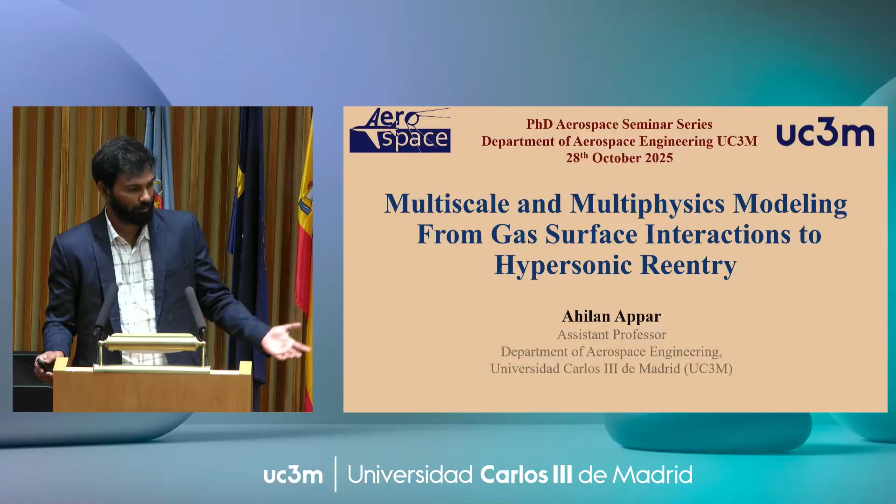My academic story: I was born and brought up in southern India, Tamil Nadu, and I did my bachelor's from Madras Institute of Technology, where I started learning aerospace, and I thought I knew everything. But when I went on to do master's and PhD at IIT Kanpur, the more and more you go into a research problem, you realize that you don't know a lot of things.

And then I did my postdoc at University of Kentucky, where I looked at gas surface interaction at very low Earth orbits. So there I made peace with the fact that academia is like a never-ending learning process. And with that wisdom, I joined UC3M, right now in front of you.

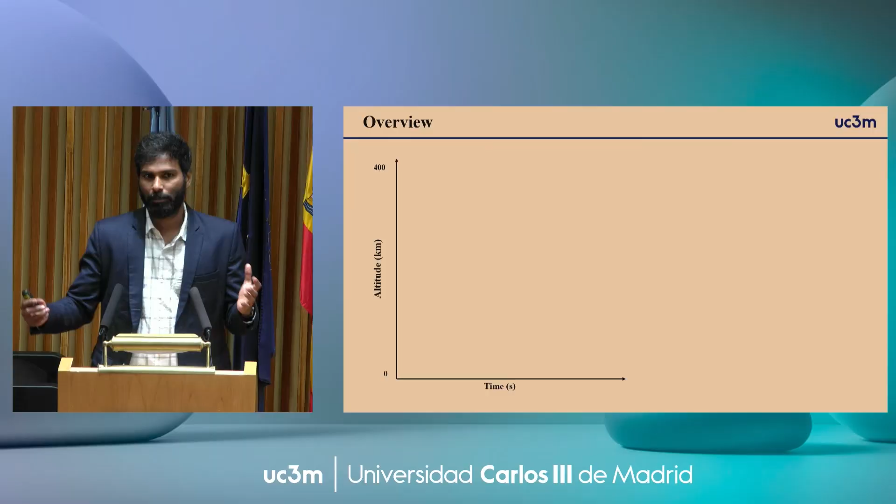And this is the overview of today's talk. I tried to connect all the work together in a bigger picture, like a narrative. So there are two themes. The first theme will talk about gas surface interaction in orbital systems. Specifically, we'll look at what is very low Earth orbit and what are the advantages and challenges in it, and what are the scientific and technological development needs in those.

And pretty much we are interested in how a satellite operates at those conditions. Okay, now let's say if I decommission that satellite and want to bring it back safely, then I also need to know how.

So in the second theme, we'll look at what is a hypersonic reentry and what are the flow physics associated with reentry. Typically what I did was aerothermodynamic analysis, like trying to couple a flow domain with a thermal domain and see what happens. Also, when you couple two different domains at the interface, you are also interested in what happens at the gas surface interface. So this is the overview.

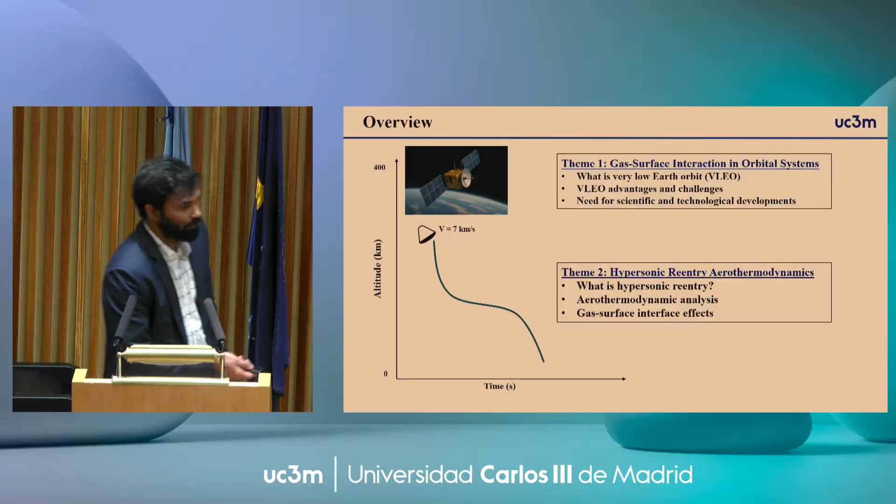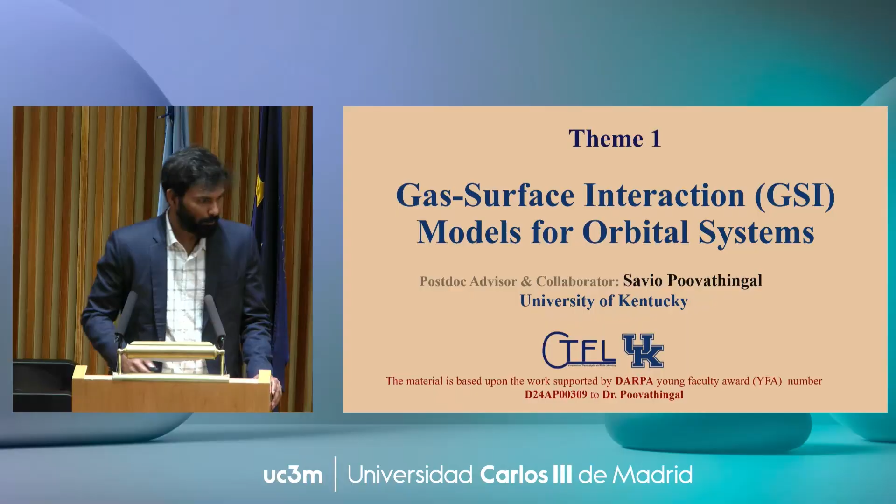And so theme one is pretty much from my postdoc work at University of Kentucky. This work was done with the support from DARPA, and my collaborator, current collaborator, and my postdoc advisor is Professor Savio Poovathingal.

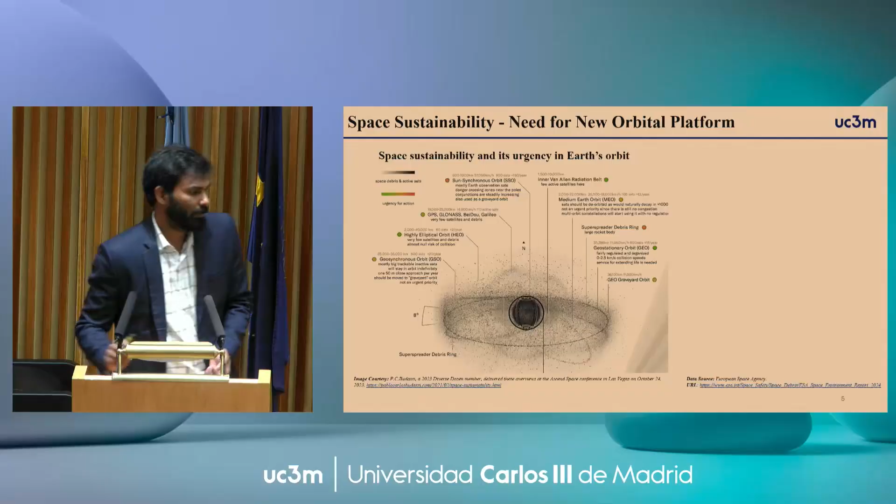So what does that mean? Ever since the first launch up until today, there are about 35,000 objects revolving in Earth orbit. And even if we stop further launches, the likelihood of more catastrophic collisions happening in the orbits is continuously increasing.

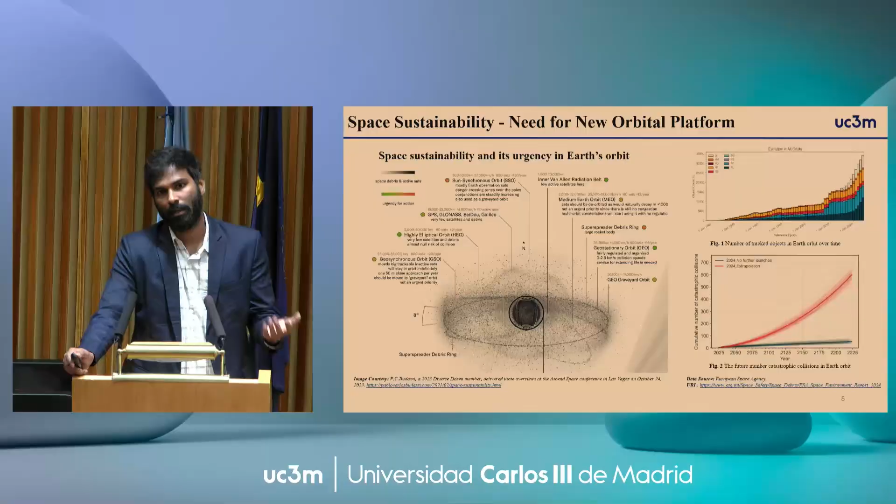We know, as a matter of fact, the launches are not going to stop. So there is an immediate need to clean the space, of course space debris mitigation. In addition to that, since we very much depend on space technologies and satellites, we need to look at what could be a sustainable or alternative option. This is where the idea of very low Earth orbit comes into picture.

This is a pretty recent concept, so there are different definitions of what could be the very low Earth orbit altitude range. I find the definition from the University of Manchester group who worked on the Discoverer project of VLEO technologies most useful, and this picture is also taken from their work.

So this is how it goes. We know 100 kilometers is the Kármán line, pretty much where space begins. Here on the y-axis I have altitude, and on the x-axis I have density, and this purple line shows the incremental velocity - the velocity I need to impart to keep my vehicle or spacecraft or satellite in orbit.

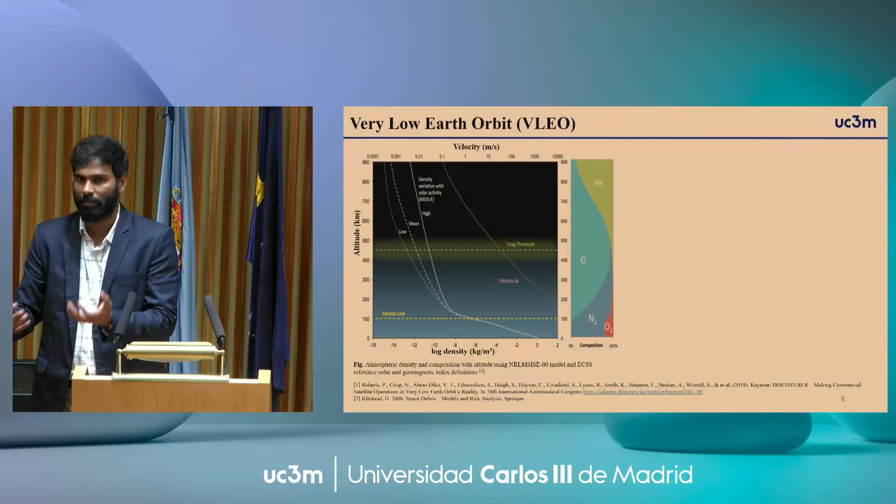If we look at, for example, about 700 kilometers for a typical satellite, it would be about 1 meter per second, which is not much. If we go a little down, let's say about 450 kilometers, it is somewhere like 50. And if we go further down, around 300 kilometers, it goes up to 1,000 meters per second, which is 1 kilometer per second - huge.

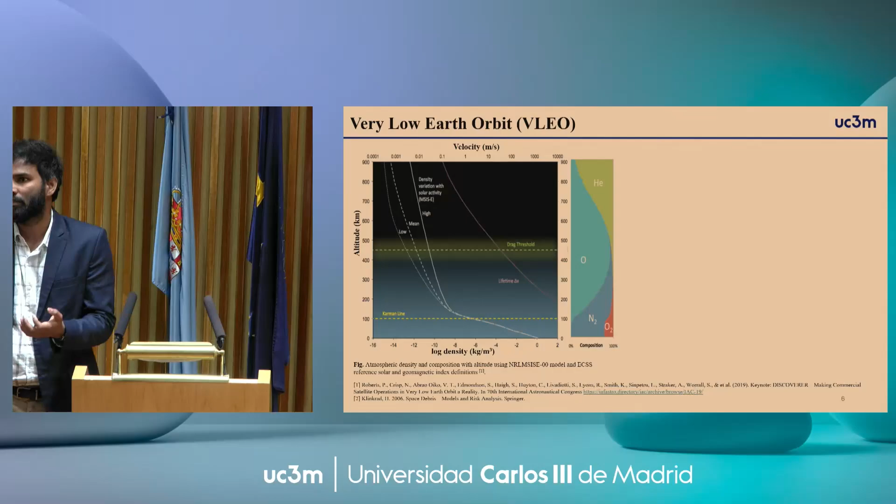What happens is the effect of atmosphere is imparting drag on the vehicle. Thereby we need to overcome that drag, so we need additional propulsive requirements. If we try to draw a drag threshold beyond which we have to consider the effect of drag, that would form somewhere around 450 kilometers, and between this altitude range we define very low Earth orbit.

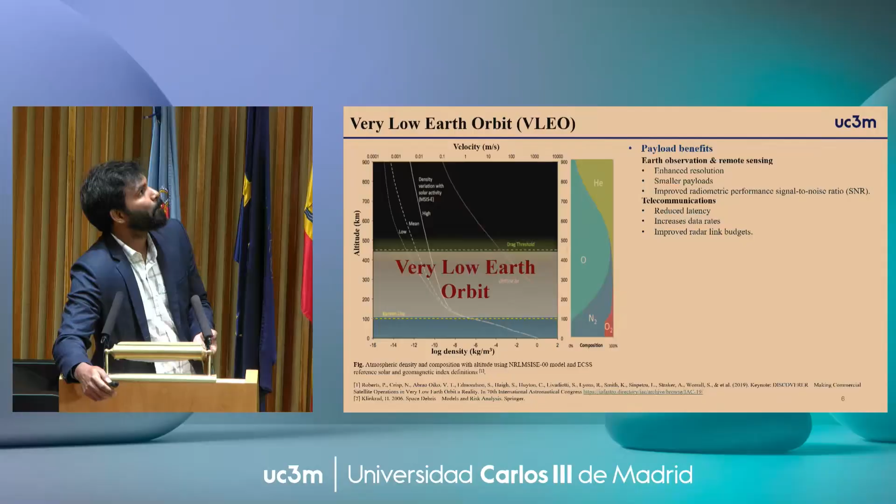All of those things I just said look like disadvantages, but why do we prefer that? Because operating at a very low altitude potentially gives a lot of benefits - payload benefits, improved Earth observational capabilities, telecommunication performance, and launch benefits. For the same launch cost, I can send more payload. And most important of all, I find interesting, is the environmental benefit.

So with all these benefits, there are certain disadvantages, or I would say challenges. If we look at very low Earth orbit, the major composition is atomic oxygen. We are looking at atomic oxygen interacting with spacecraft surfaces at hyperthermal velocity, which is about 5 electron volts or roughly 7 kilometers per second.

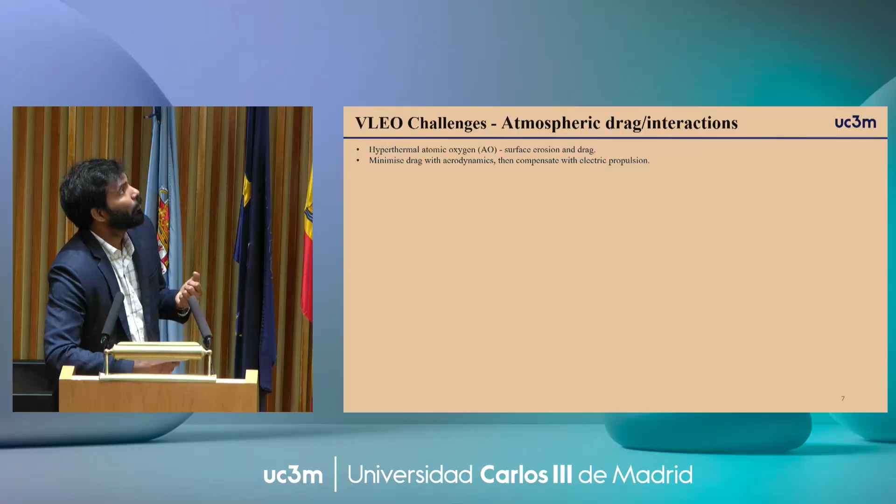So the major considerations are drag and surface erosion because of the atomic oxygen - continuous exposure of your satellite to atomic oxygen. What I need to do is minimize drag through aerodynamic consideration, like design and modeling, choosing a better low drag material, and things like that. The rest of the drag we need to compensate using propulsive requirements.

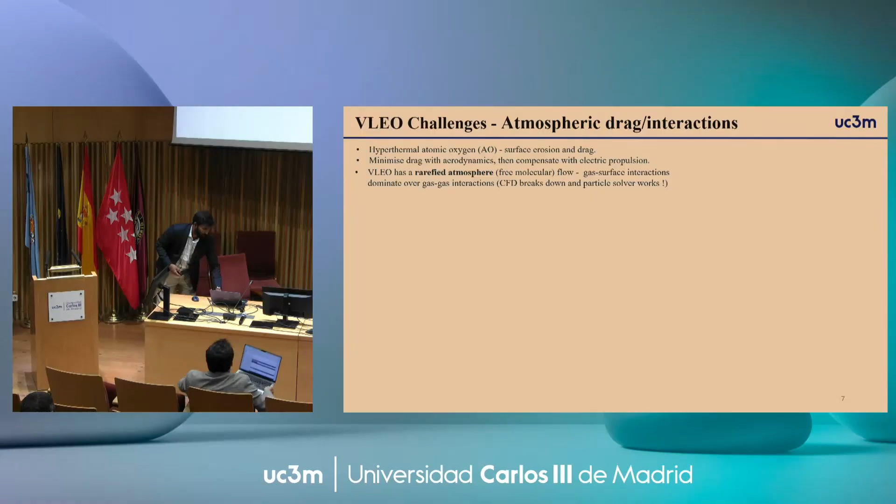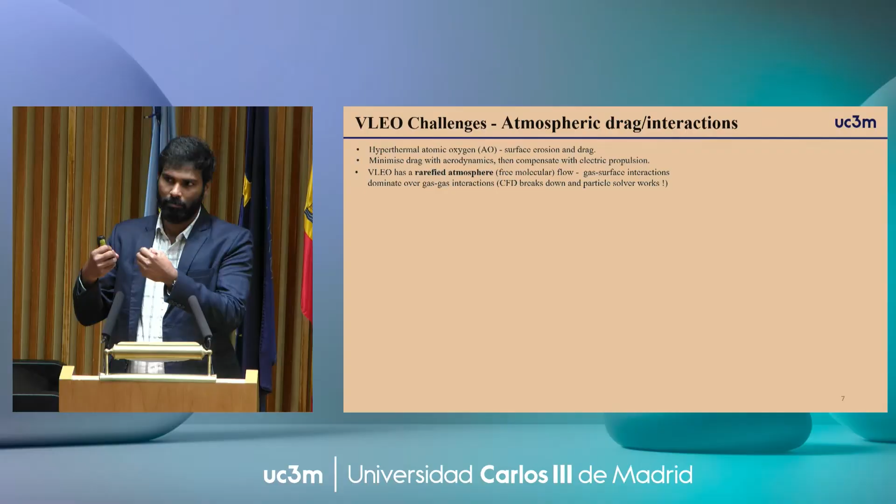Also, these altitudes have rarefied atmosphere. By rarefied, what I mean is typically if I look at a flow, the particles will have some mean free path - the average distance between two successive collisions. If we look at VLEO or outer space, the distance between two particles would be far apart, which is of the order of or greater than the scale of the vehicle itself. So the probability of two particles colliding and equilibrium flow happening is rare.

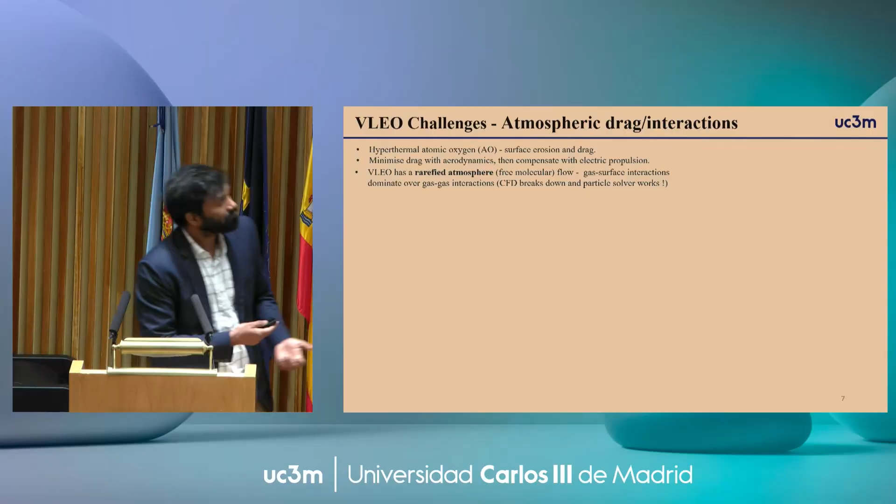But what happens when an object moves through that? The gas-surface interaction dominates. Typically, what I can say is gas-surface interaction dominates over gas collision. So in those situations, the continuum assumptions break down, and the CFD solver, which is based on the continuum assumption, breaks down. Here we use something called particle methods. What does the particle method do? We just directly simulate the particles over the flow.

So for this, to define the boundary, I need something called a boundary condition. I need to define how a gas particle interacts with the surface and scatters. This atomic interaction of gas with surface macroscopically manifests as the drag experienced by the vehicle. So what is important is accurate modeling of this gas surface interaction.

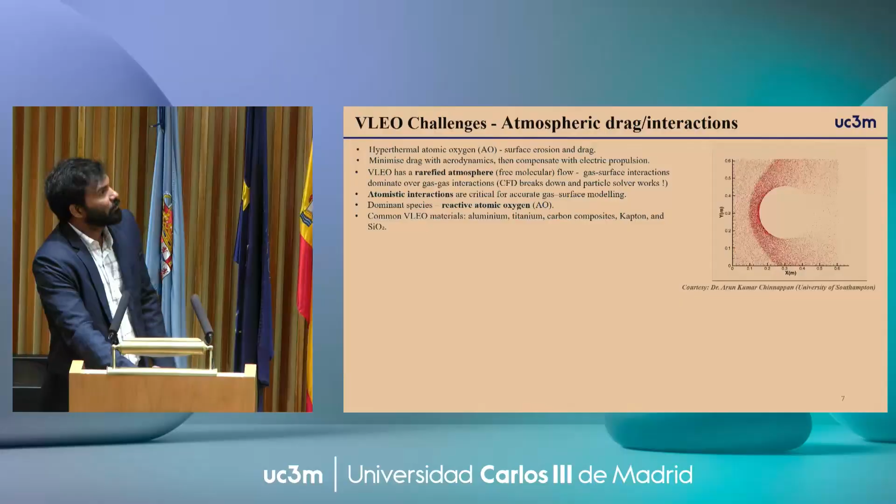If I am interested in all the macroscopic aerodynamic quantities like drag, thrust performance, etc. - and the dominant species is reactive atomic oxygen. These are some of the common very low Earth orbit materials like aluminum, titanium, and silica coating, which is atomic oxygen resistant. We also have polyimides like Kapton, the golden layer you see in a typical satellite image. So what we are interested in is how atomic oxygen interacts with various satellite materials.

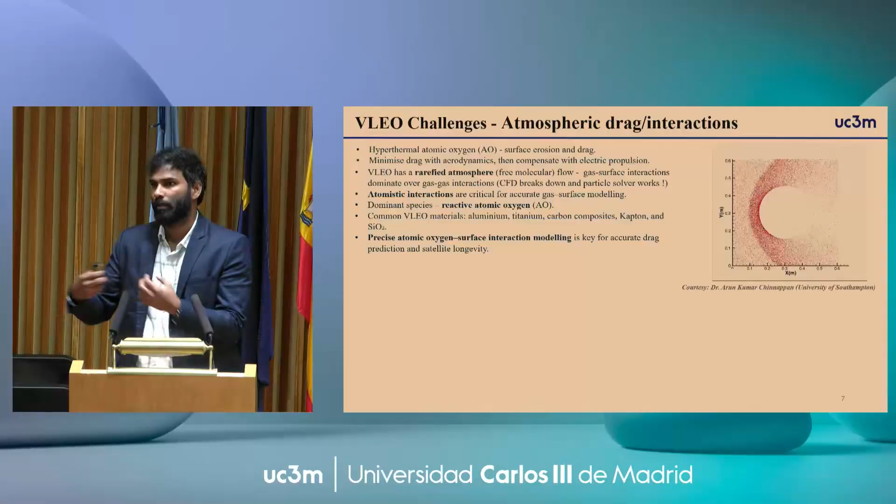In this particular problem, I'll come to that. But if we look at all the research ideas, the major research areas in very low Earth orbit - like development of low drag or atomic oxygen resistant material, or calculating drag to know how much altitude and orbital decay is happening, or designing atmosphere breathing electric propulsion. For example, instead of taking limited propellant like xenon, I would collect the atomic oxygen and use it for propellant - this is something like a sustainable operation.

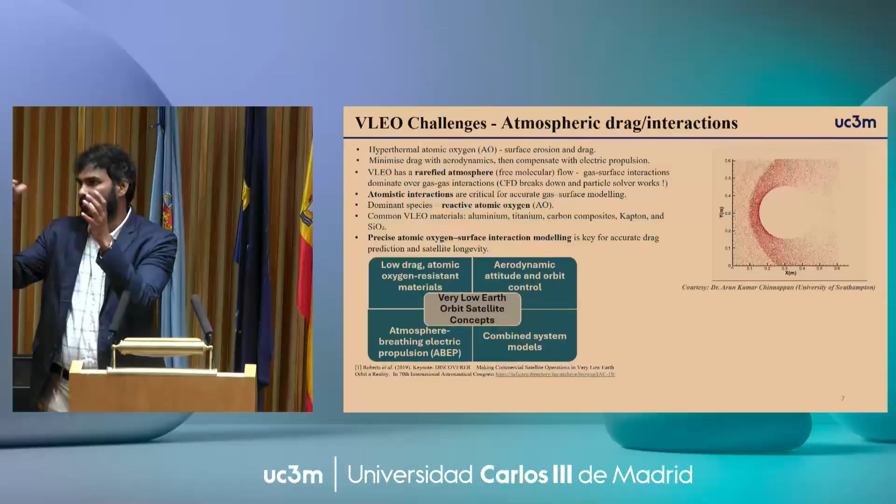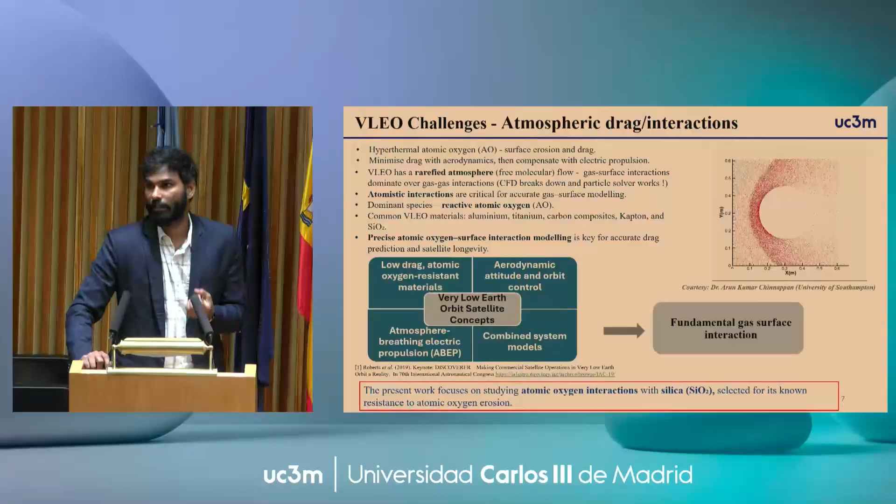And if we put together all these subsystems, how does the system behave as a whole? These are the major areas, but all of these boil down to the fundamental interaction of gas with the surface. So in this work, we are looking at atomic oxygen interaction with silica - we started with silica for its atomic oxygen erosion resistance quality.

So this is how the big picture looks. We start with the material selection, which is silica. Then we model it in molecular dynamics - we basically create a small surface element, surface of the silica. Then we try to impart or shoot the atomic oxygen onto the surface, corresponding to all the orbital conditions, like the velocity equivalent to your vehicle's, and that is the velocity the atom interacts at. The big picture is that we are studying gas surface interaction of atomic oxygen with silica surface using molecular dynamics.

After that, I'm going to build a gas surface interaction model, which is like a boundary condition, rich in atomic details, or I would say molecular fidelity. These boundary conditions can be used in particle solvers like DSMC, PIC, etc.

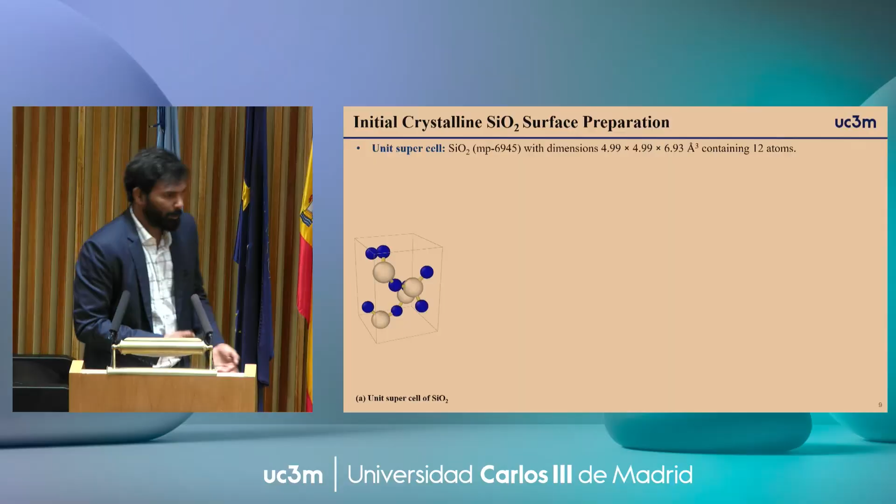Now, the surface preparation starts with a unit silica cell, and then I replicate it in all three directions to create a crystalline substrate. But realistic amorphous silica is not a crystal, so we need to thermally anneal it - by that I mean I heat it to a high temperature and then cool it.

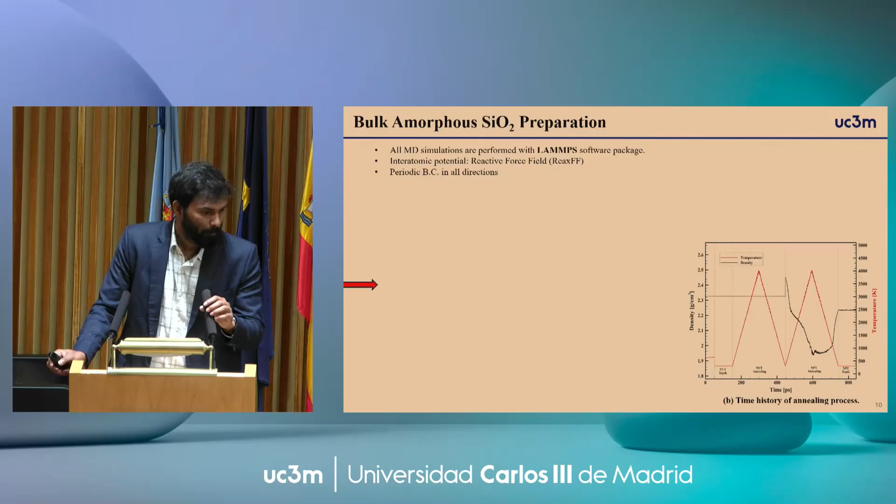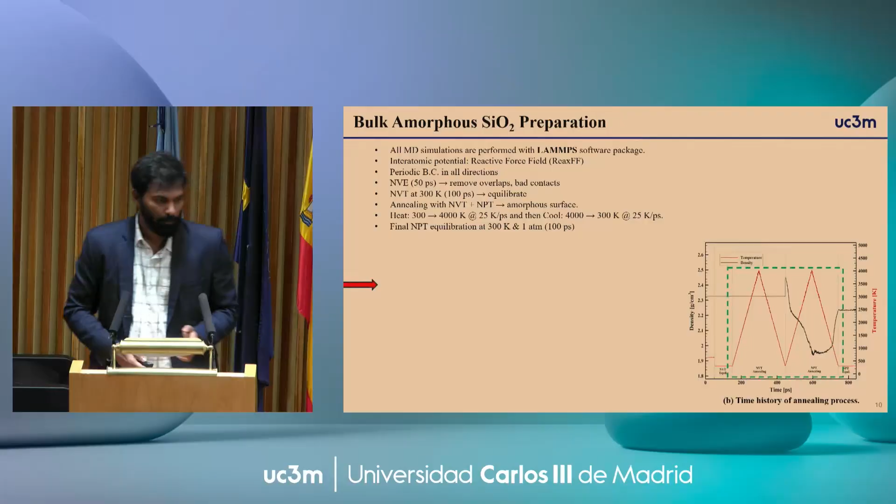There are different ensembles in molecular dynamics, like the way you treat your system - some of them are NVE, NVT, and NPT, which means N is number of particles, V is volume, T is temperature, P is pressure. We basically treat using NVE, NVT, which is pretty much number of particles and volume constant, and temperature can vary - it's like adding some thermostat to your substrate. And then the same for NPT. By doing that, I get an amorphous silica which is close to a real silica, kind of.

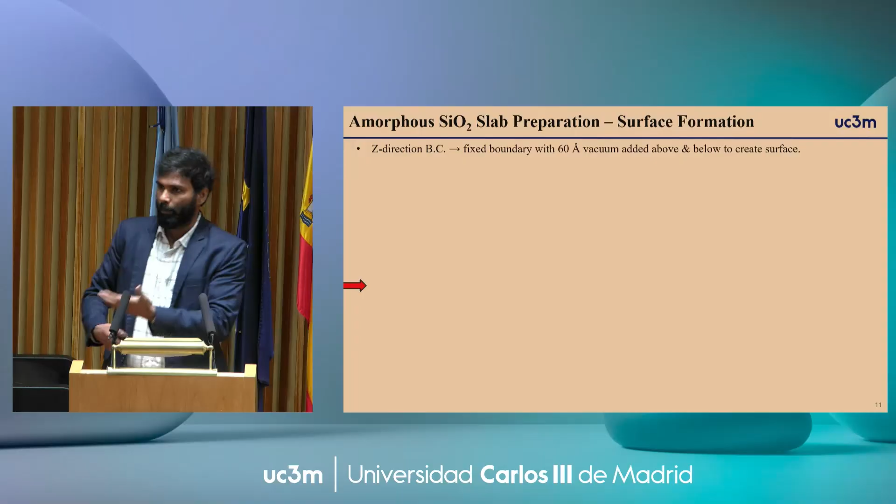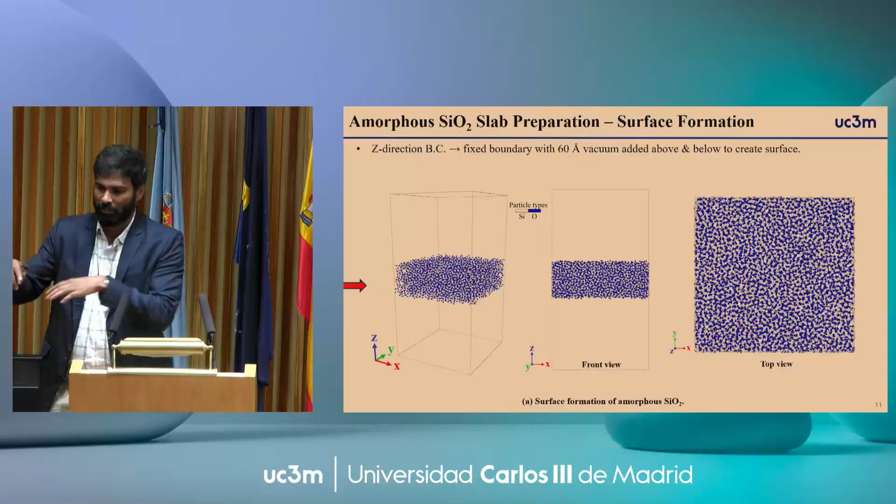Now, before this we used periodic boundary conditions in all three directions, which means it's an infinite substance. But we are interested in gas surface interaction, so I need to prepare a surface. So what I'm going to do is create a vacuum in the z direction, which is where I'm going to shoot my atomic oxygen. By creating a vacuum, it's like slicing the infinite crystal, so there will be deformed bonds and things that form a surface. And we just equilibrate it with the temperature that I want my substrate to be. This marks the end of substrate preparation.

At this point, we validate the structural properties of silica with both experiments and molecular dynamics using different interatomic potentials. And I forgot to mention that in this problem, we used reactive force field, which is preferable for calculating chemical reactions on the go, and for scattering simulation - that's why we preferred reactive force field.

To improve statistical convergence, we performed about 20,000 independent simulations using the molecular dynamics package LAMMPS. Out of these, 23% of particles reflected, and the remaining 76% were absorbed into the surface. That absorption is a problem for later, but right now we are focused on the particles that scatter off the surface.

This is what we get from molecular beam experiments, where they shoot a beam of atomic oxygen onto the surface of interest, the beam scatters, and they collect the post-scattered beam to see the distributions. In this work, Professor Minton at University of Colorado is a collaborator who does the validation effort for different materials.

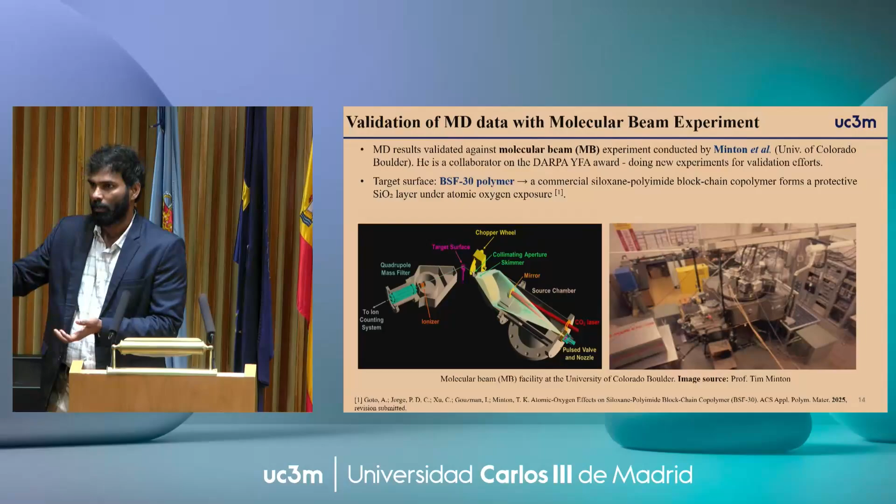In this particular case, we try to validate with a material called BSF30, which is a polymer that has silicon in it. This means it's not actually a silica layer, but a material that, upon exposure to atomic oxygen, forms an atomic oxygen resistant layer of silica. This shows that we can also use materials that oxidize to form silica on top, which prevents the material from further damage.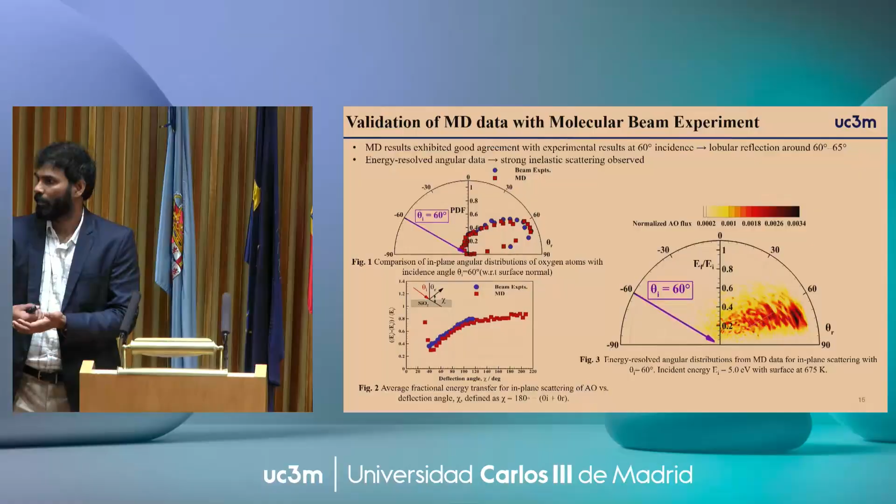You can see all the particles that scattered have a reflected energy that is lower than the incident energy, which means all the collisions are inelastic. So the particle, upon hitting the surface, imparts some of its energy and reflects.

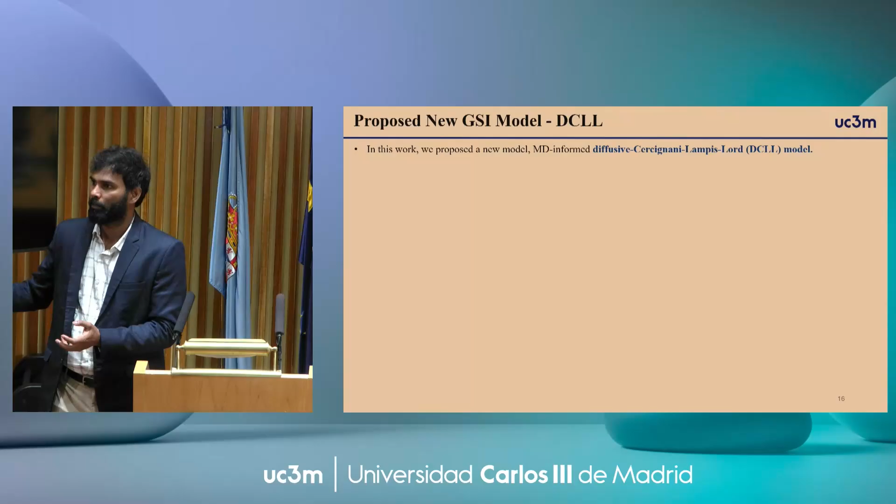Now we come to the part where we develop a new model. The new model is called the Diffusive Cercignani-Lampis-Lord model, DCLL. But before that, let's compare how the classic models like Maxwell and CLL compare with the beam experiment.

Maxwell, of course, is fully diffusive, so the probability of reflection is equally probable in all directions. So you get a nice circular distribution.

In reality, I guess CLL was introduced to capture this partial scattering behavior in a lobular distribution, but even CLL cannot capture the distribution behavior that we observe in typical orbital conditions.

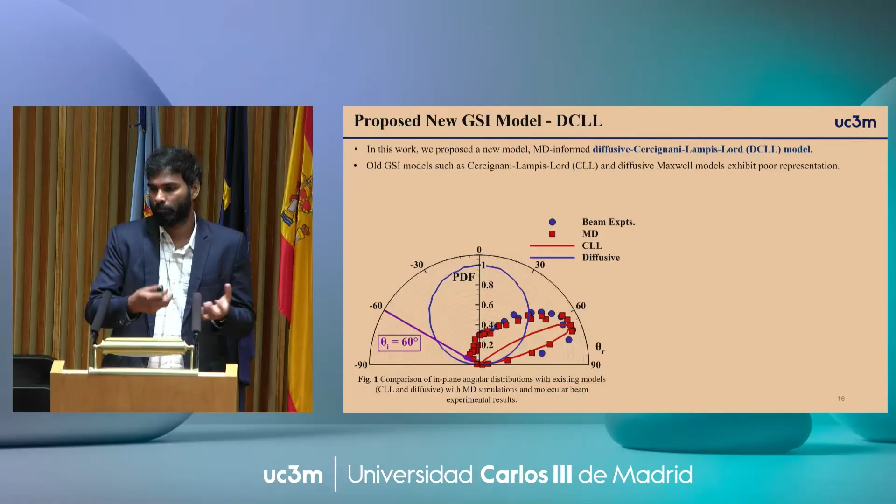So this model that we proposed combines the best of both worlds. That's why we named it Diffusive CLL, which gets its scaling parameters from the post-reflection data we obtained from the molecular dynamics. This is how it looks.

We were able to capture this post-reflection behavior, or the influx in-plane angular distribution, to very good accuracy. The good thing is there are other GSI models which are physical, but implementing them into a particle solver framework is the challenging task.

So my model as a standalone can produce better results, but I want to fit it into a boundary condition and see how the macroscopic flow properties are behaving.

This DCLL model has pretty much the same implementation procedure as CLL and diffusive models, so it directly fits into the DSMC framework, or PIC as a future extension. The beauty is that it also includes material-specific interaction. For example, this particular scattering behavior is for a silica substance.

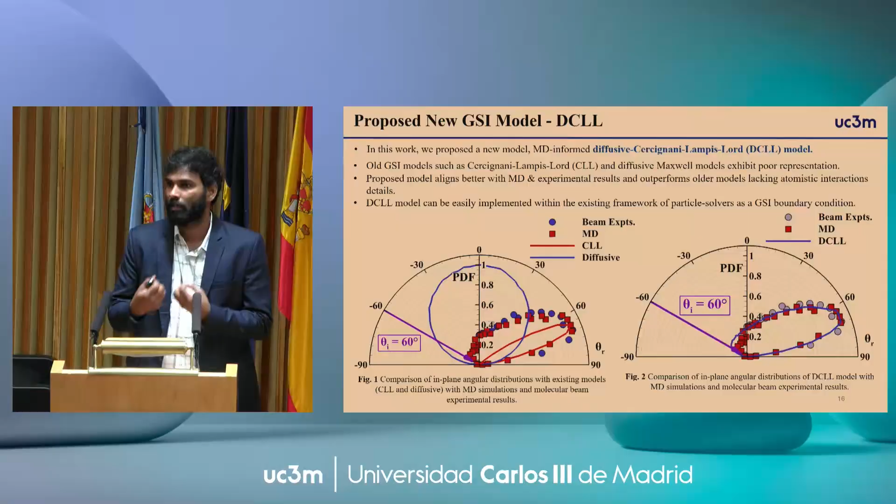If I use a different material, we have something called the model interaction parameters that would capture the material-specific data into it. So with that, this part, theme 1, is concluded.

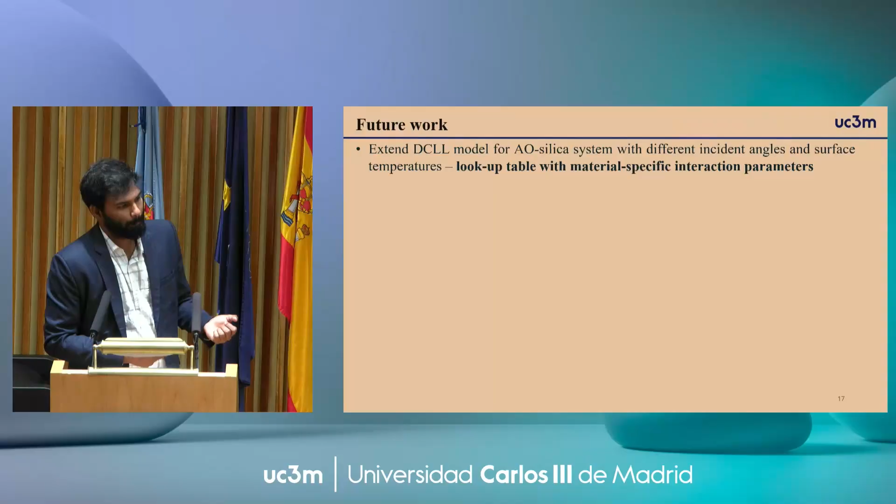For future work, we try to include this DCLL model for different angles of attack and various surface temperatures, which will result in a lookup table that can be easily integrated, like a library form.

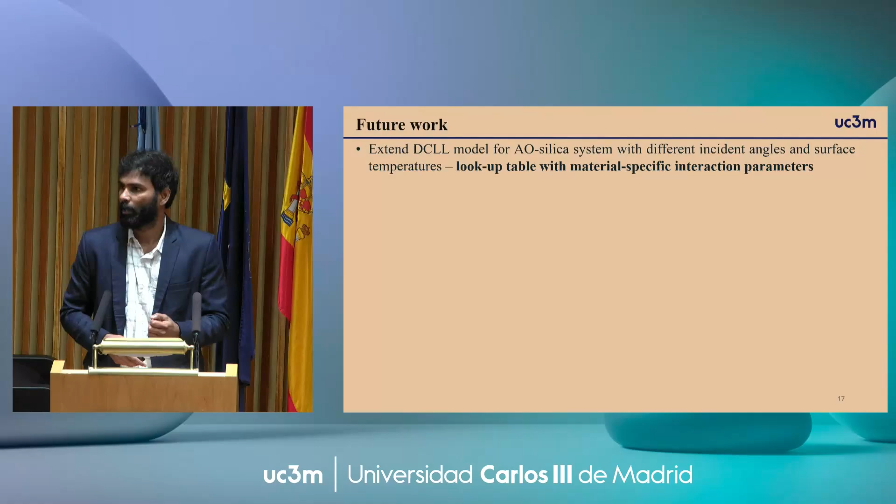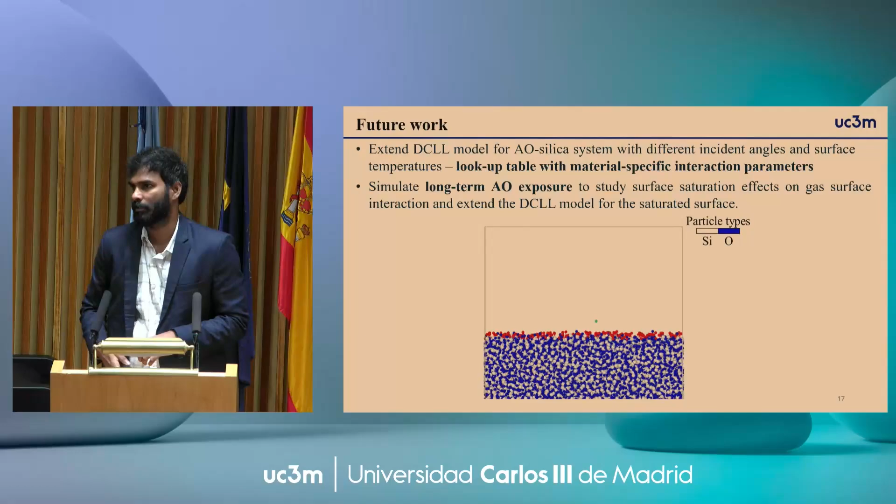I'm also interested in looking at what happens to a surface when we expose it to atomic oxygen for a longer time. Even in this model, exposing to an actual longer duration is not possible, so with certain intervals of time, we shoot the atomic oxygen onto the surface to let it reach a saturation state. I could see the graph reach a saturation state, and now I want to do the same scattering and see what happens.

So this is also building a GSI model. This is a work in progress, and we possibly want to extend this DCLL model to other materials, for example highly oriented pyrolytic graphite, which is called HOPG.

In a beam experiment done to study gas concentrator shapes in very low Earth orbit or low Earth orbit conditions, they tried to compare the scattering behavior of, let's say, silica versus HOPG on the concentrator, and how the collection efficiency and other factors compare.

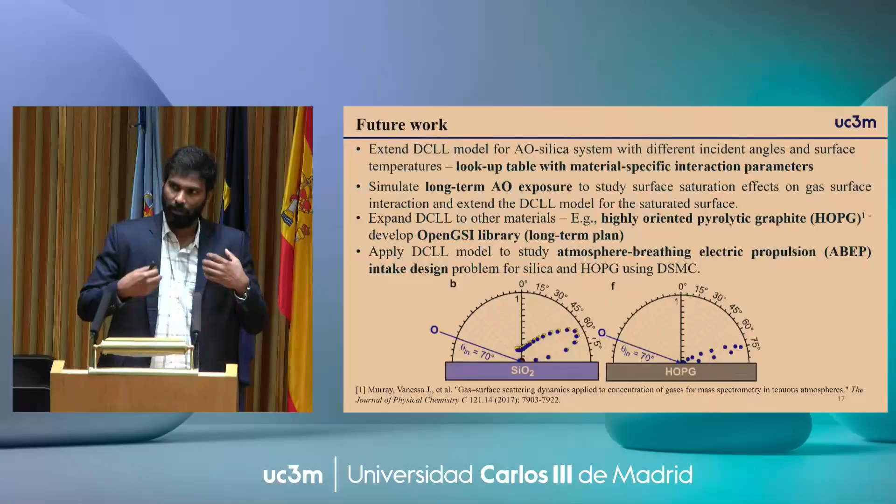With HOPG, the beam experiment shows this surface produces superspecular behavior, which is more desirable if I'm interested in low drag. So the possible extension of this work is to model HOPG in molecular dynamics, do the scattering experiment, and try to build a model interaction parameter that can be used in the existing DCLL model for a system-scale simulation.

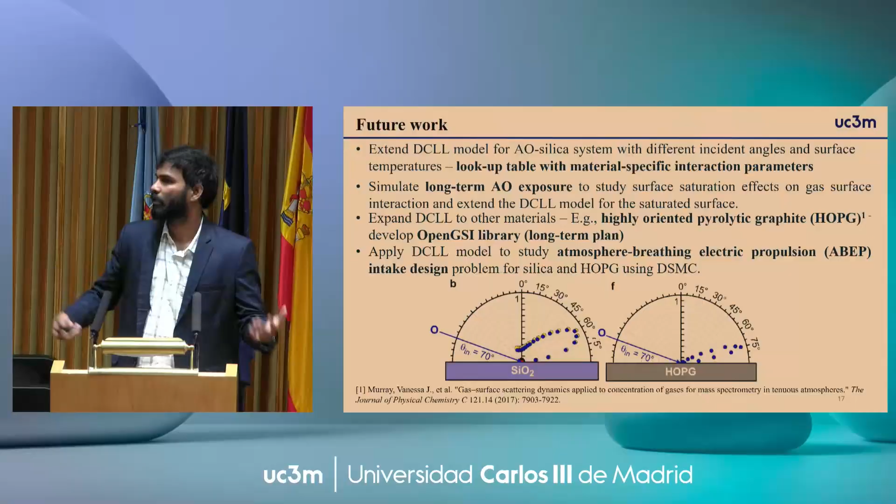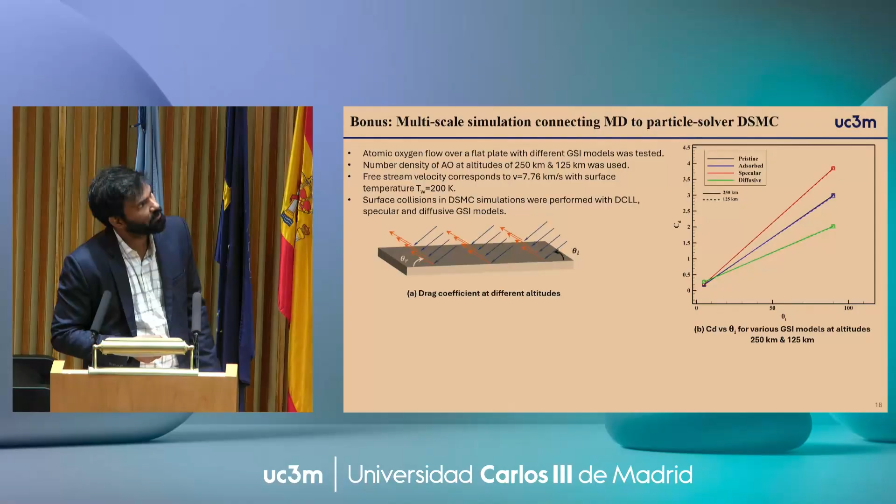This is a bonus slide where we actually try to apply that GSI as a boundary condition into an open source solver, Sparta. These results are not exact because it was still in the developmental stage, but I just wanted to show that scale bridging is possible if we have an accurate GSI model. For example, this is specular behavior and diffusive behavior, and the realistic behavior is somewhere in between. So this is the bigger picture of it.

And with that, we come to the second theme, which is hypersonic reentry aerothermodynamics—probably the boring part of this lecture, I guess, because I lost my touch. This work was done with grants from DRDO and ISRO, and my advisor is Professor Rakesh Kumar at IIT Kanpur.

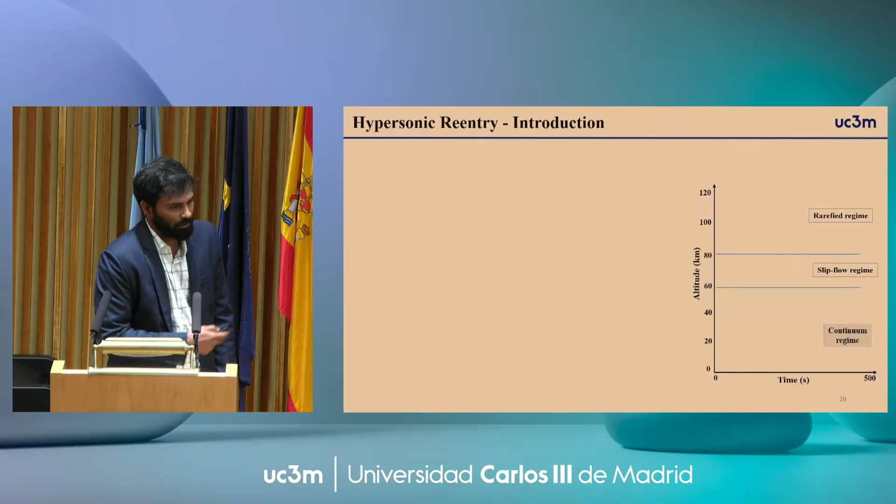So this is how a typical reentry looks. A reentry begins at the 100-kilometer Kármán line, and then based on mission requirements, I can take a steeper path or a narrower path. Let's say this is my vehicle, and it's going to take a certain path.

What happens is the vehicle enters with very huge kinetic energy, and due to air friction, there will be conversion to thermal energy and a lot of heat. We could reach a maximum heat flux of about 100 to 10,000 kilowatts per meter square at the semi-rarefied regime, which is somewhere in between your rarefied and continuum regimes. Still, the velocity of the vehicle is in the hypersonic regime, so at this velocity we have all kinds of complex phenomena happening.

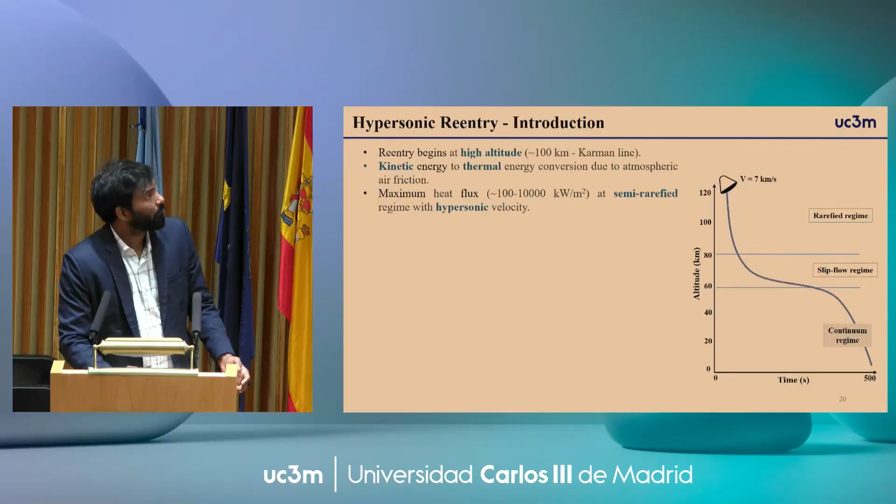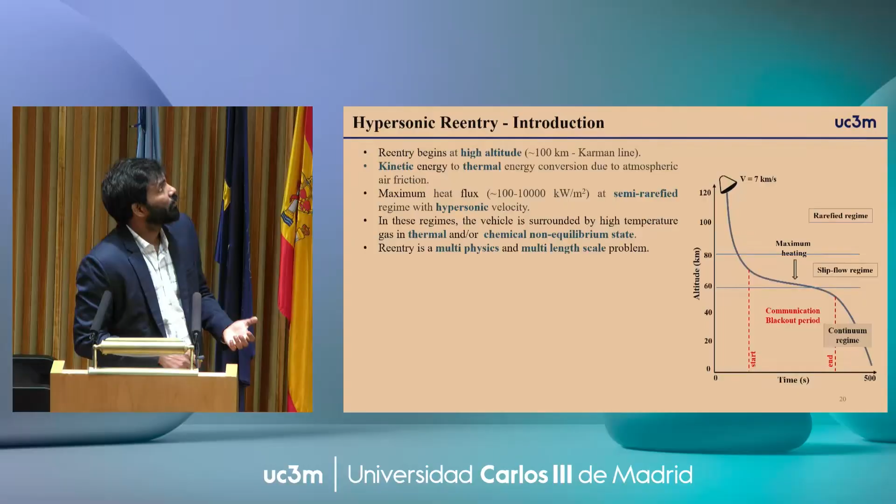For example, ionized gas tries to cover the communication devices and block certain radio frequency waves, which is called the communication blackout problem. Typically, the vehicle will experience high temperature gas which is in thermal and chemical non-equilibrium, and that makes reentry a multiphysics and multi-length-scale problem.

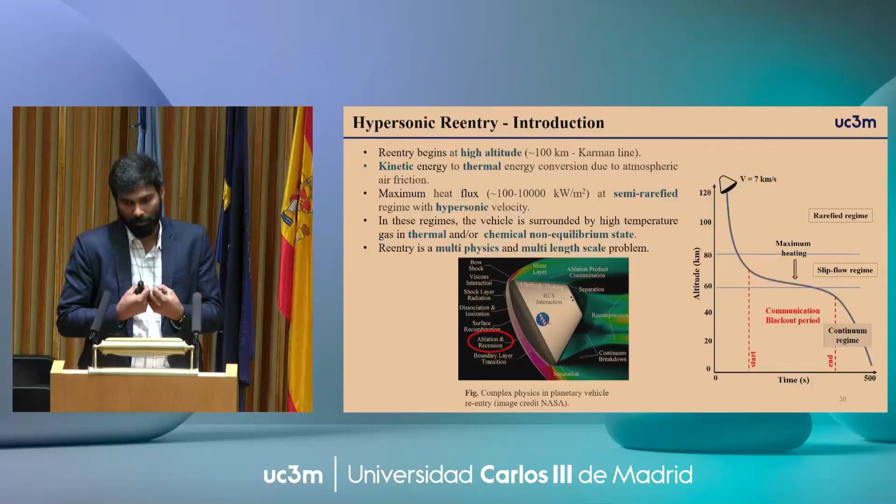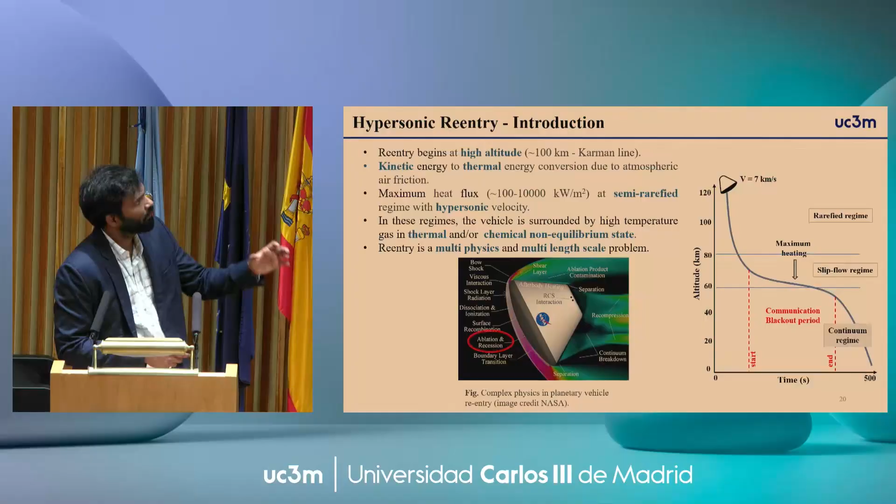So in a typical reentry, I have strong shock and weak shock, with dissociation and ionization happening between the surface and the shock wave. Dissociated compounds, like dissociated oxygen, can combine with the carbon in the surface, which will ablate the material. Material also ablates through heat alone, when it reaches a certain temperature called the ablation temperature. There's also boundary layer transition, and behind the wake we have continuum breakdown. So all in all, this is an example of multiphysics with many length scales involved.

So if we look at my vehicle, it's going through all regimes. It starts with rarefied regime, goes through slip flow, and then comes to continuum regime. I can use my CFD solvers to some extent here, up to a certain portion of slip flow. But if I go beyond that, I need to use something called a particle solver, which is DSMC.

DSMC numerically converges to the Boltzmann equation. And the Navier-Stokes equation also, if you try to put an equilibrium condition in the Boltzmann equation, it would give you Navier-Stokes.

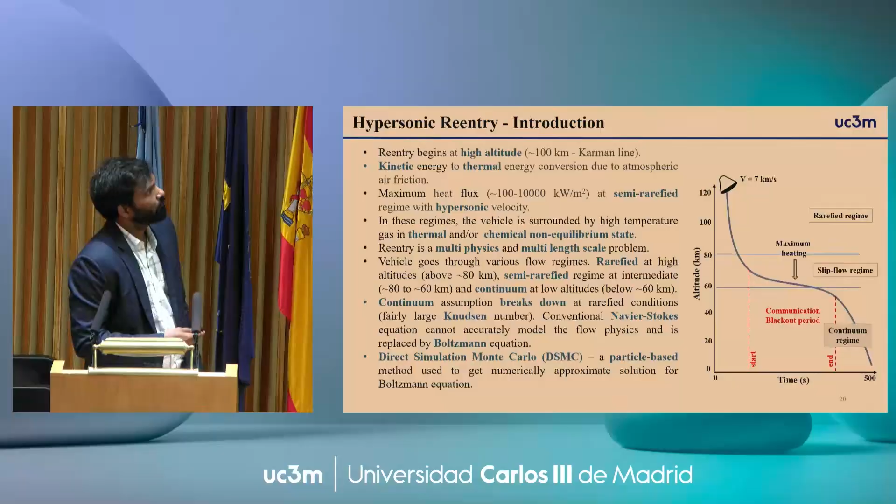DSMC is a particle-based method. We basically simulate the particles, impart some position and velocity, and based on the condition, the particle would move. It would collide with itself and with the surface, producing the macroscopic flow quantities. It is based on the Monte Carlo method, and it's not exactly solving the Boltzmann equation, but tries to mimic the physics.

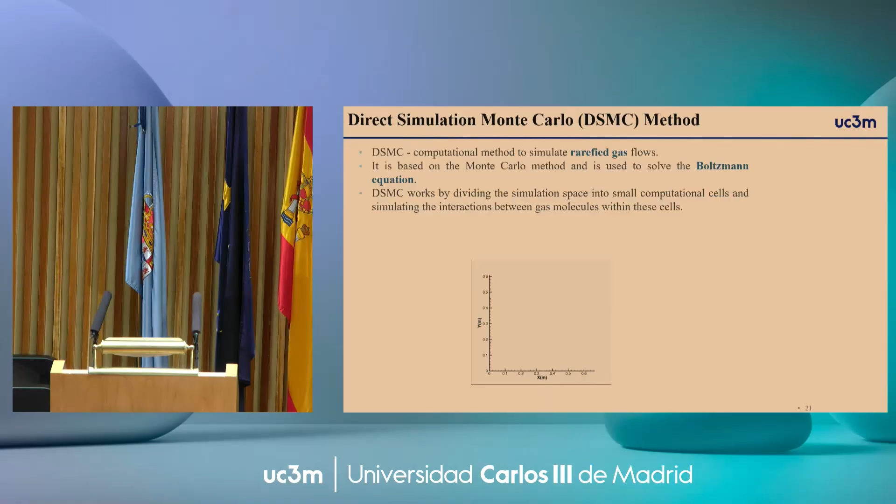It typically works by defining a grid, and based on the DSMC requirement, my computational cell and time step has to be within the molecular range. It should not be bigger than the molecular scale of the flow conditions. Then we basically try to simulate the particles, and if we put a surface in its path, it would align based on the gas surface interaction models.

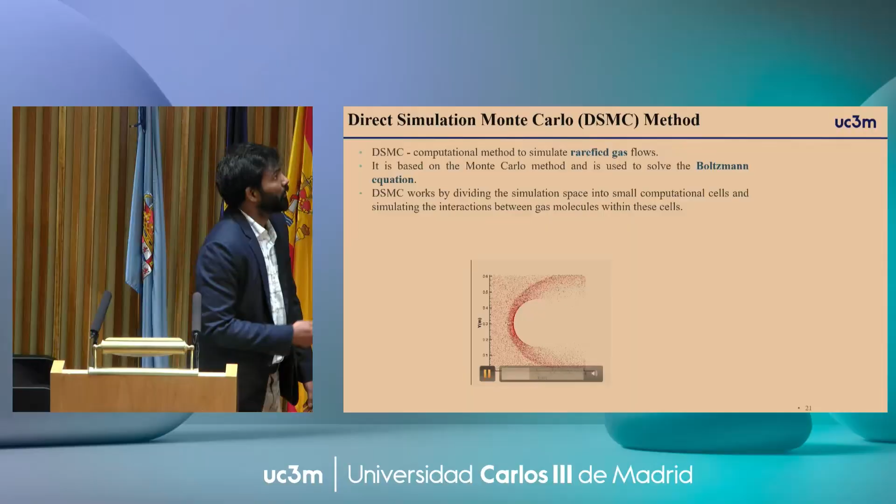For example, in this particular case, you could see the formation of a shock wave around that blunt body. And it can handle non-equilibrium flows. Of course, simulating the real number of particles is not possible.

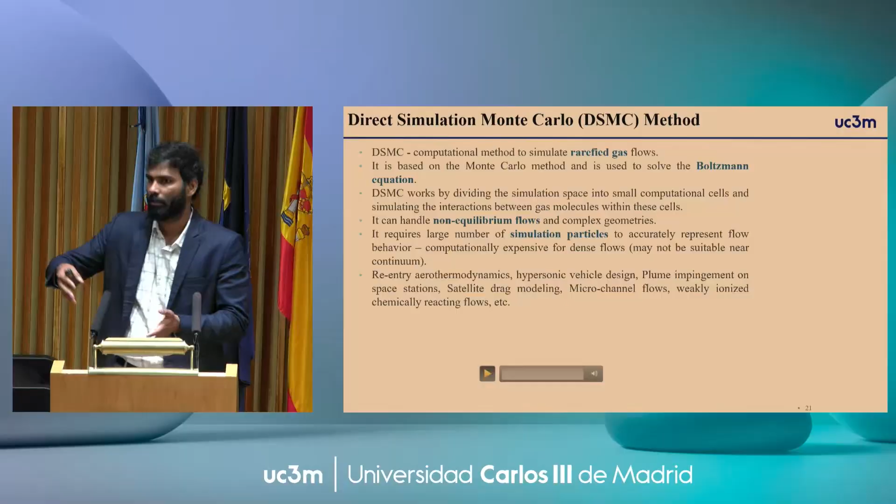So we assume something like a particle weight. One simulated particle is equal to a certain number of real particles. The point is to reduce the computational effort, but still the physics remains the same.

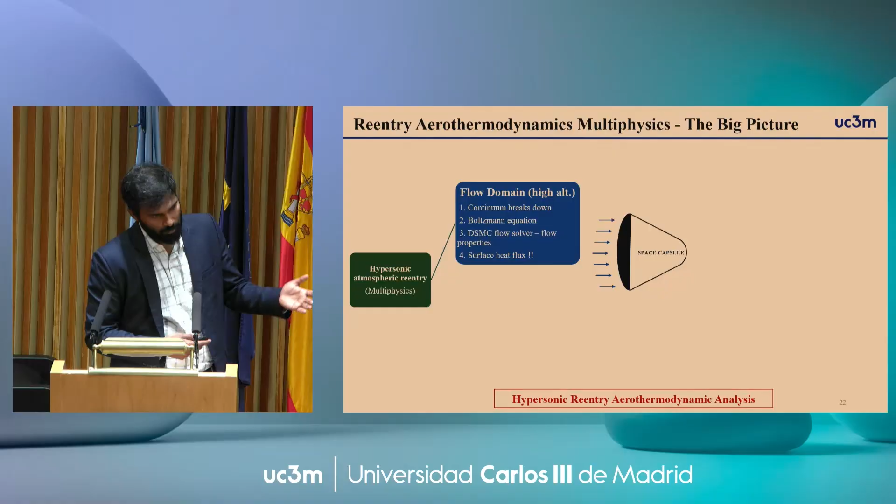So what I did is look at the multiphysics aspect. We have a flow domain; solving the flow domain, I get the heat flux. Because of the heat flux, my material gets heated up, which will be solved using a thermal response solver. In my PhD, I developed a 2D axisymmetric thermal response solver.

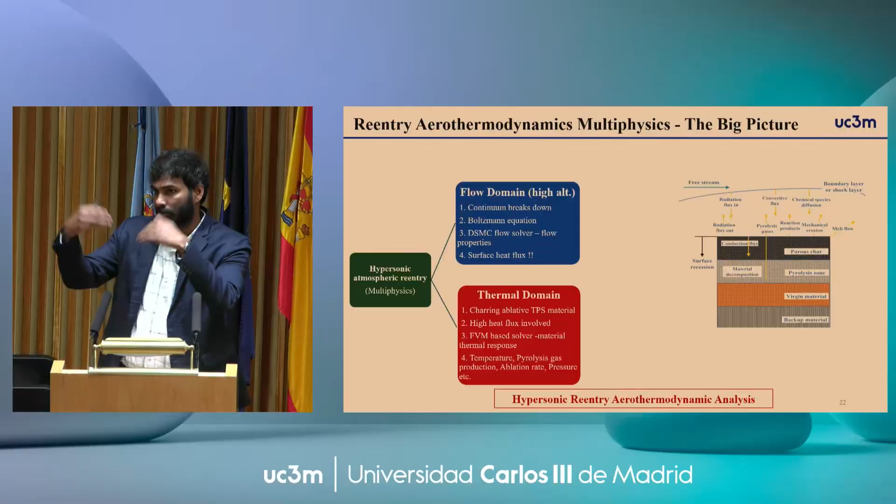This gas perspires through the porous char layer, which is like a carbon layer, and then forms a thin protection layer kind between the hot shock and the surface, which further attenuates the heat flux impinging on the surface. Also, beyond a certain ablation temperature, you have material ablation, mechanical erosion, and radiation flux coming from the ionized gas particles inside the shock wave.

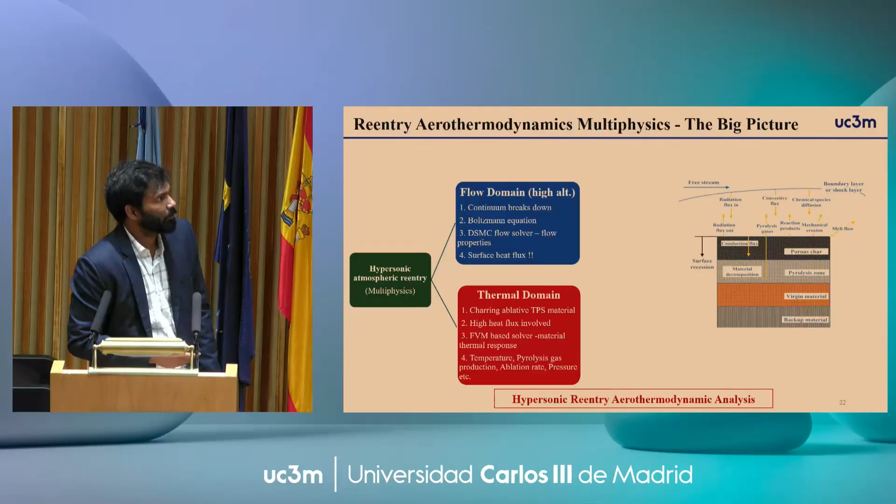That's again a lot of complex processes going on. So what happens is, at the interface with all these complexities, I need to couple my flow and thermal solvers, which is an ongoing problem, as people try to include different levels of complexity. So basically we try to capture the gas surface interaction effect.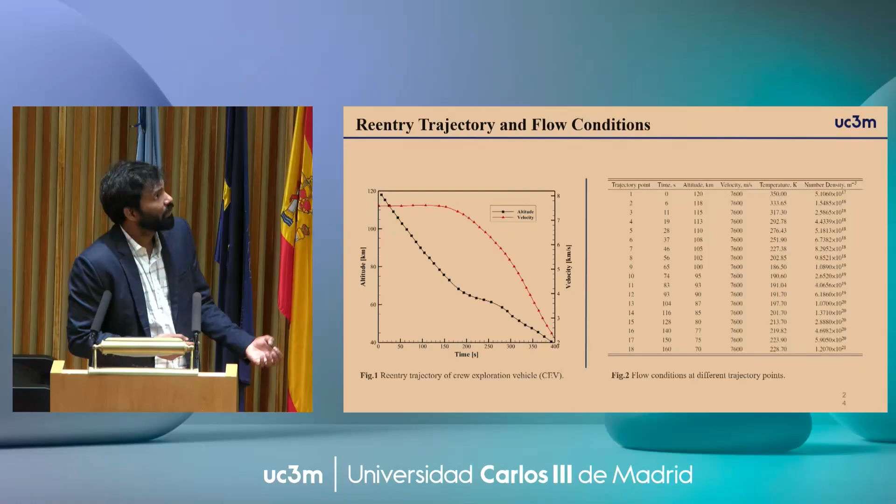We begin with our trajectory. This is the trajectory I used, and I chose points about 2 kilometers apart. The corresponding velocity, temperature of that altitude, and the number density are all known from the standard atmosphere data, and the velocity data is something I get from the trajectory.

So when I try to couple, I need the heat flux data at a given altitude. Of course, by solving the flow I know the heat flux, but I don't know what the heat flux would be at the next trajectory point, like if my vehicle is entering.

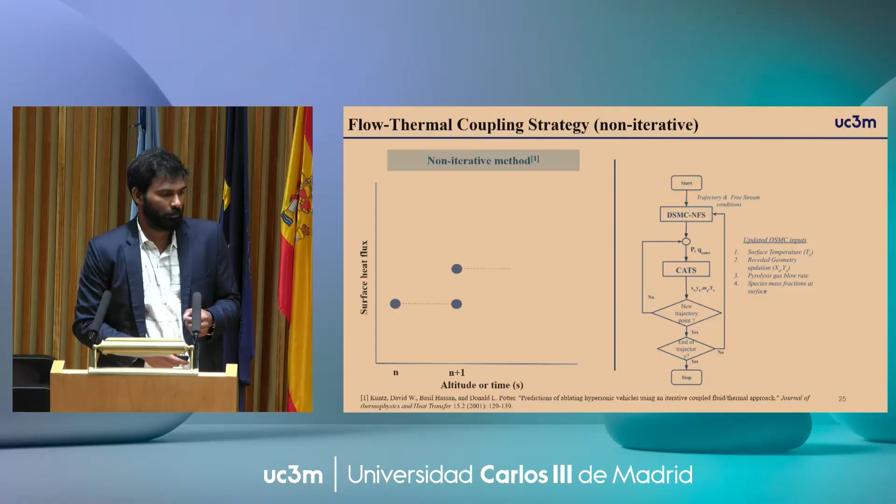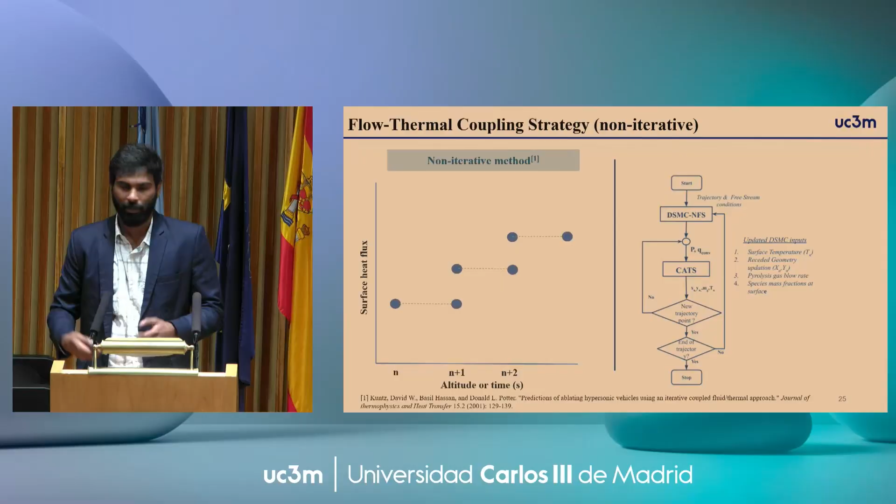So if I don't know, I cannot do the analysis. So a simple analysis is to assume the heat flux is constant between two trajectory points. Thereby we do the analysis by assuming the heat flux varies piecewise constant between two trajectory points. But the problem is the ablating pyrolysis process is nonlinear and it leads to a lot of instabilities in the numerical flow.

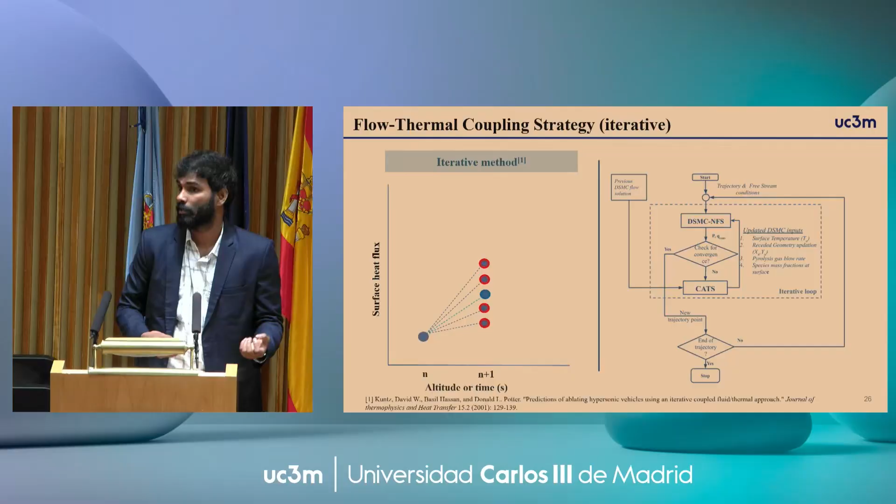But the problem is, I try to couple DSMC in iterations, which means huge computation, and I cannot do multiple iterations of it. So I stopped at that point, and I said, okay, this is enough for my PhD.

So yeah, from what I just told, if you remember, I chose two altitudes, like 2 kilometers apart. So how do I choose my global time step? Because my flow is typically happening at a molecular level time scale, and my thermal heat conduction is happening at the system scale. So the difference is something like 10 to the power 9.

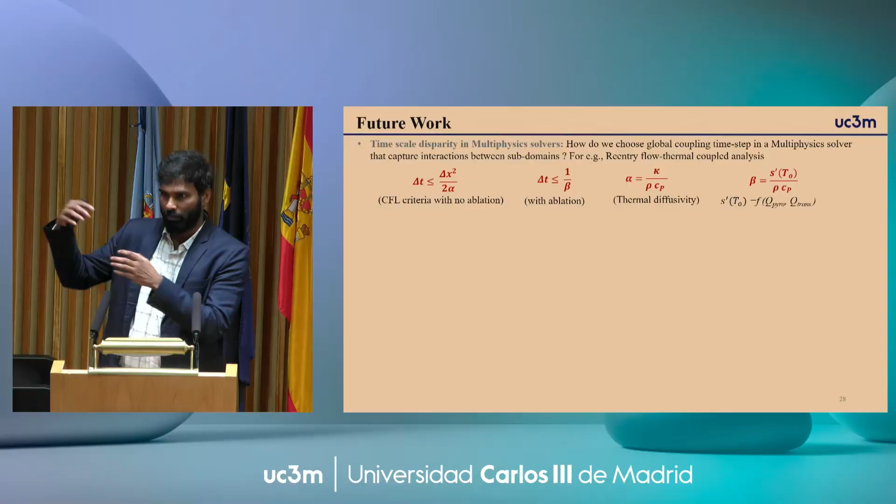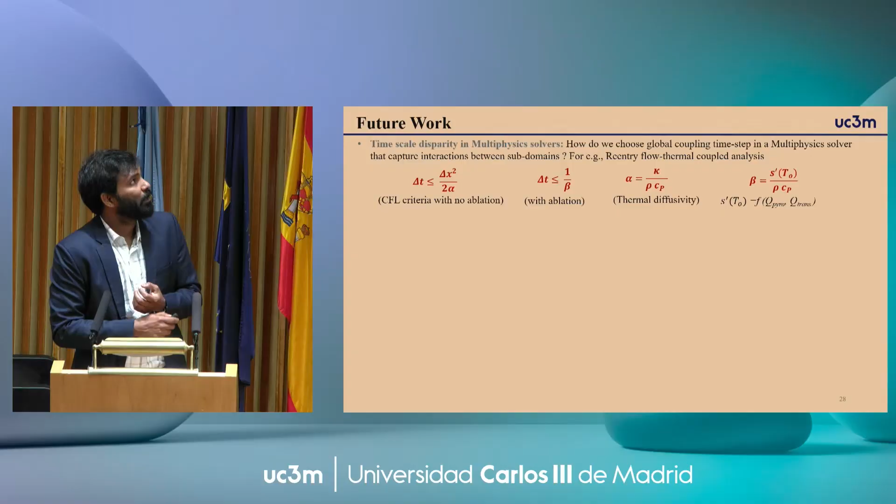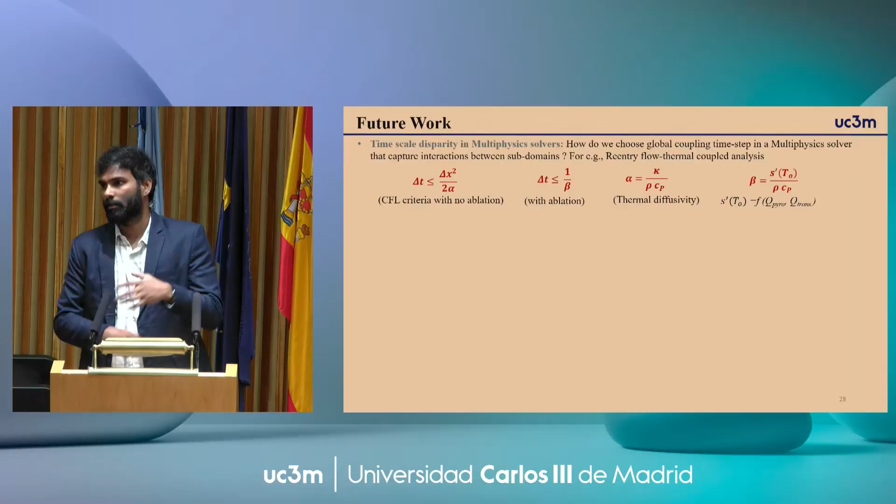And even in heat conduction, if I just consider pure heat conduction without ablation, my time step is nothing but the Fourier number. But if I consider ablation and pyrolysis, the time step is dictated by the mass flow rate of pyrolysis gas and the ablation rate. This dictates my delta T, which is very slow, and that is a problem I want to look at. And also to quantify the criteria, like how many iterations I need to get a converged solution, that is also something I'm looking at.

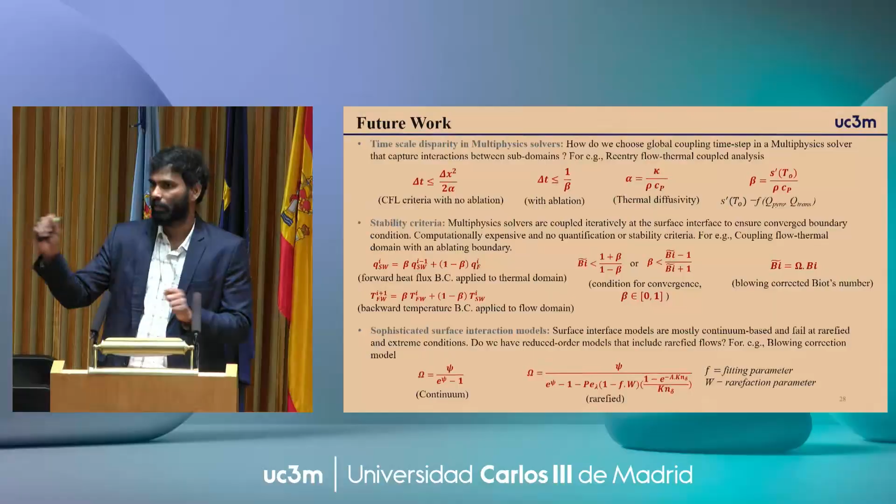So we have something called a blowing correction model in the continuum regime, which says if a certain mass flow rate of gas comes to the surface, it reduces the heat flux that is going into the material. And that reduction is given by omega, which is based on continuum. I kind of, out of curiosity, tried to expand it to rarefied flow, and it looks complicated like that. And this is something I'm actively looking at.

And also I want to quantify the rate of ablation. For example, if I'm looking at a targeted reentry, if atomic oxygen impacts a surface, it can scatter, and also it can erode the surface. How do I quantify it in a macroscopic sense? So that is also something I'm interested in looking at, which will be future work.

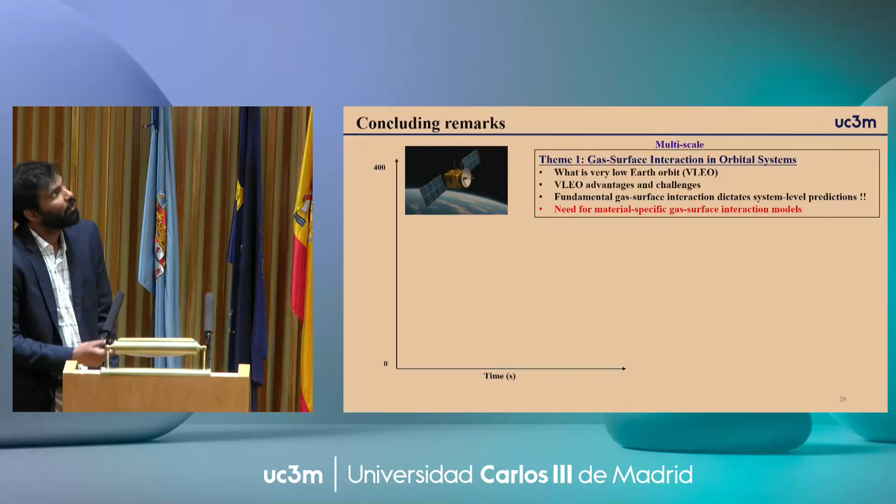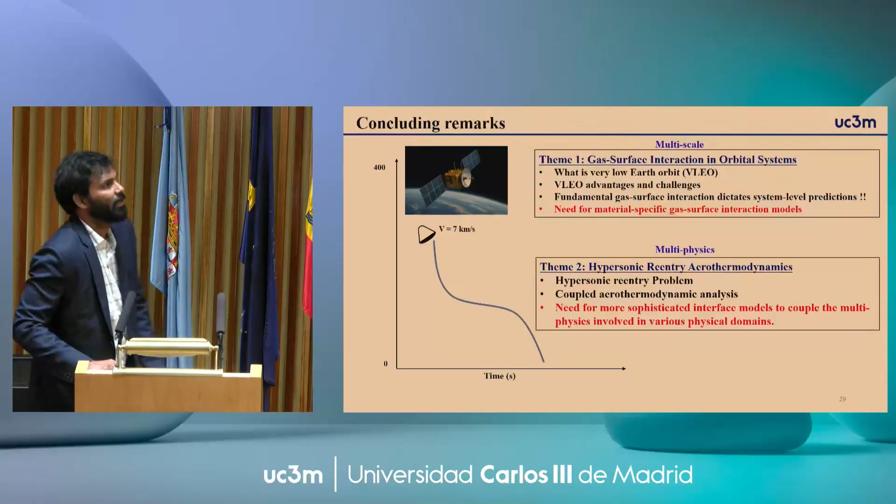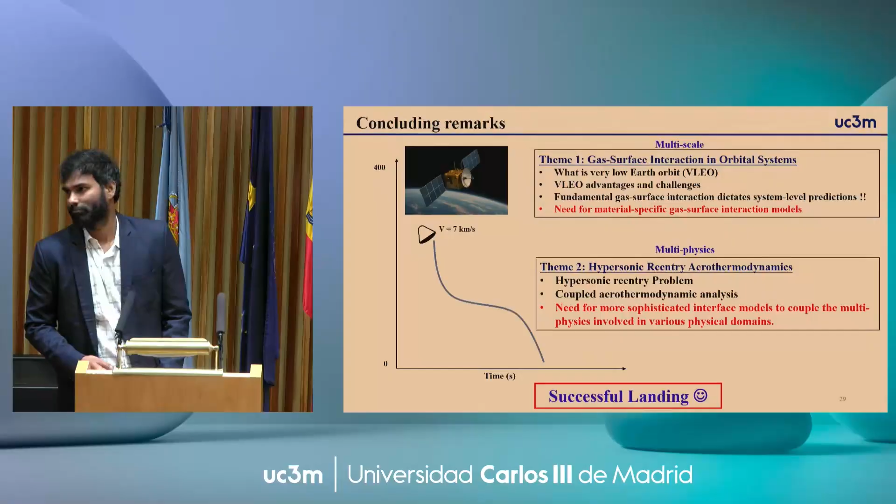So with that, I guess theme one, we looked at what is VLEO and its advantages and challenges, and the need for better gas surface interaction models. And if we try to re-enter, which is a multi-physics aspect, there's a need for more sophisticated interface models when I try to couple multi-physics. So this is the big picture of what is happening and what I did. And with that, I guess I finish my talk. Thank you.

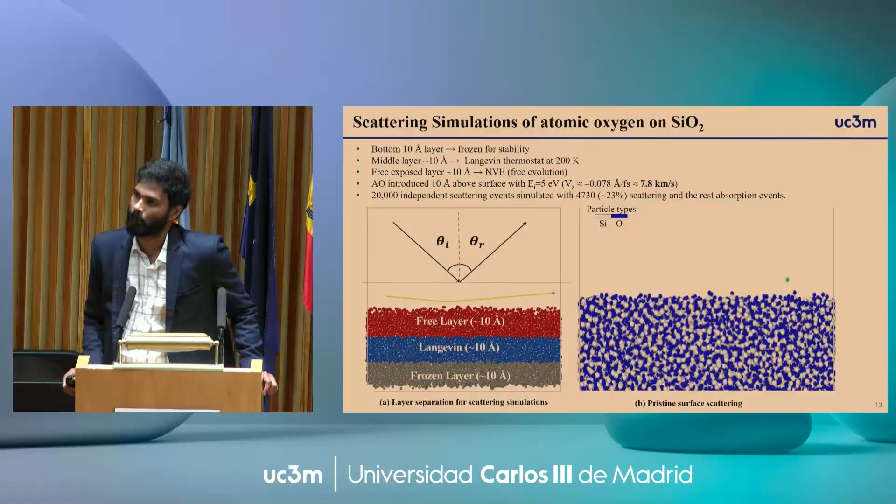I see, so is this temperature transfer, this energy transfer, transitioning into a damper model for the molecular dynamic simulation? Has it been simulated correctly? What is the underlying method for simulating the transition of energy flux or temperature into a damper? Do you mean something like an accommodation coefficient that says how much of the energy will be given to the surface when an interaction happens?

Maybe the right word would be something like a sink. The whole point of this layer is it acts like a sink to keep my substrate temperature at the desired condition that I want. For example, when we tried to fix the simulations, there were initial simulations that showed the temperature shooting up really high because the energy is too much, so the structure disintegrates. So then you choose, by your sensitivity study, how much thickness to keep so my structure is stable, while also controlling the surface temperature.